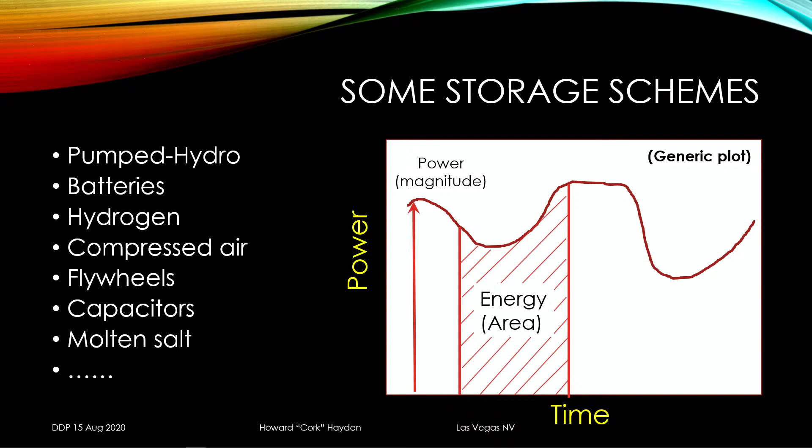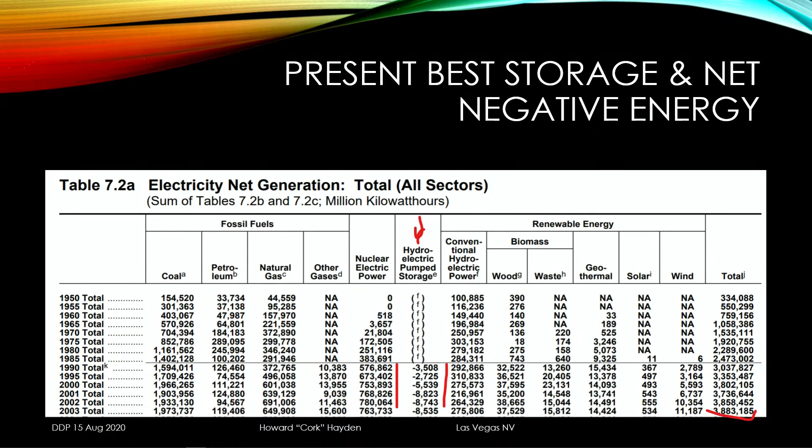Okay, now the first one we'll talk about here just very briefly is what's called pumped hydro, because that's the only candidate in town. There are no others. Pumped hydro. You'll notice I have a column there marked in red, and that's hydroelectric pumped storage, and you'll notice down there that the numbers are negative. All those storage systems are net losers, but sometimes you want a net loser simply because it makes other things work better, and that's good enough for the kind of people I run around with.

Now, down in Queensland, that's another place where the sun always shines. The university goes 100% solar energy. What do they mean by that? 100% of what? All electricity, all heat, all transportation, all the time? Or are they getting energy from elsewhere during the night and so forth?

Anyway, the knee-jerk answers to these questions are: you can store solar energy during the day, use it at night, so midnight solar energy is available, and it's cheap. And the wind is always blowing somewhere, and besides, there's storage. We will have some discussion about those matters.

But now we come to some things that kind of turn people's stomachs. It's called numbers. And we need to spend just a little bit of time with that. But the numbers for this purpose are not hard.

And by the way, I'm using the arithmetic system where 1 + 1 = 3 for very large values of 1. For example, 1.3 + 1.3 is 2.6, rounded up. It's 3, right? Very large values of 1.

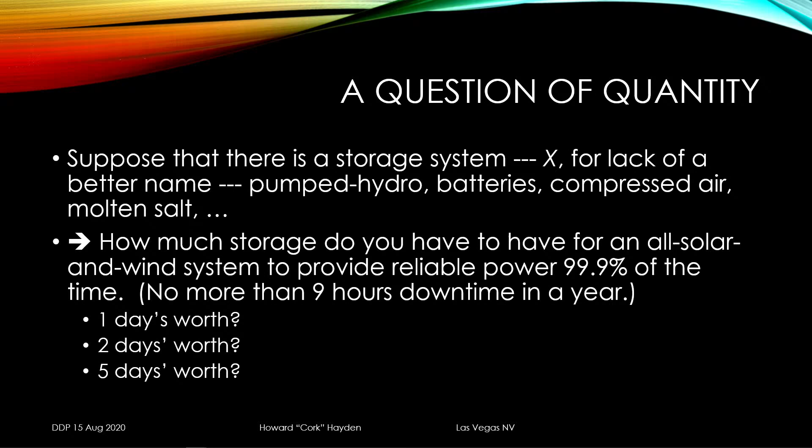Let me tell you about natural gas combined cycle, and you'll see why it's there. In an NGCC plant, the front end of the thing is a turbine engine, just like the one in the airplane that didn't fail, that brought you here, except that it doesn't have any thrust.

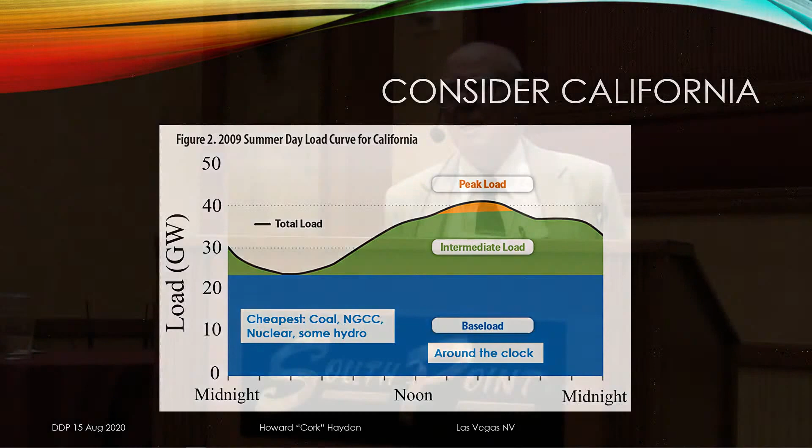By an invention that took place at Pratt & Whitney some years ago, they found a way to make single crystal, some kind of advanced metal alloy, that they use for the turbine blades, because most crystalline things are polycrystalline, and those grain boundaries are where things come apart. So they make things out of single crystal. So the upshot is that they can run those hummers at really high temperature, and you get really high efficiency. They run something like 45% efficient. But the exhaust comes out hotter than a $2 pistol.

So they run this exhaust through some big ducts, and a friend of mine has a factory in Pueblo where they make the ducting for it. And they send this hot exhaust over to a place where they now run a steam cycle. Well, the steam cycle isn't terribly hot steam, but it works. So they put the two together, and I think the highest efficiency so far is something like 62%.

They're really nice devices. Why not use them for the intermediate load? And the answer is, well, when you have a steam plant, you've got a big amount of thermal inertia to deal with, and you can't turn things on rapidly, and so forth. So the combined cycle units get used around the clock. For the intermediate load, typically people use natural gas and hydro.

If you look up the data on hydro power plants, you'll find out that they have an annual capacity factor of something like 30%. And the reason is that those plants come on, say in the afternoon when there's a big demand for power. They have lots and lots of separate generators. The water runs through all those generators, generates a lot of that power. The water level goes down. At night, they turn them off, the water level comes back up. So they're overpowered, and deliberately they're made for handling intermediate load.

Then there's the peak load, and you get out your billfold or your COVID-safe credit card.

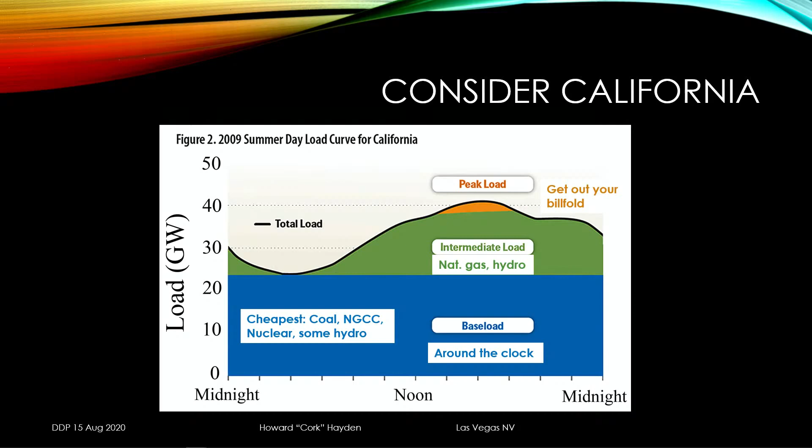Okay, so now the amount of energy we have to store. Now we're talking about generating energy for 1 day's storage. So we want to generate the area under that curve, under the black line there. That's how much energy we want to generate, but we have 4 hours to do it in. Therefore, we have to have about 6 times as much as the average power in order to charge the whole thing up in 4 hours. So we have kind of an odd thing here. We've got an average demand of about 35 megawatts. I'm sorry, this is 35 gigawatts, giga.

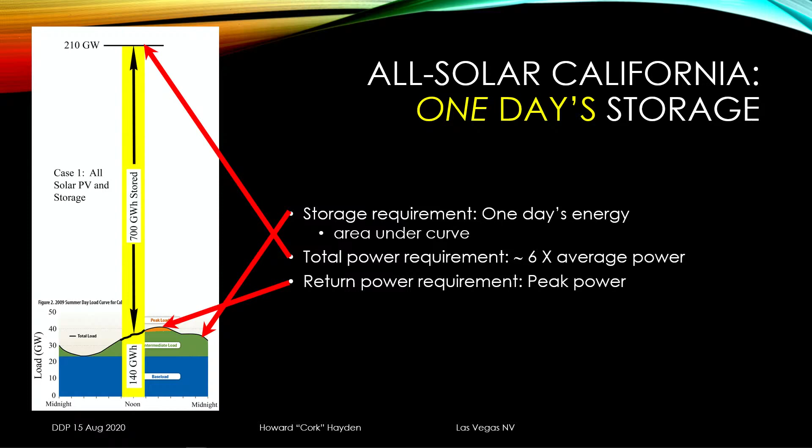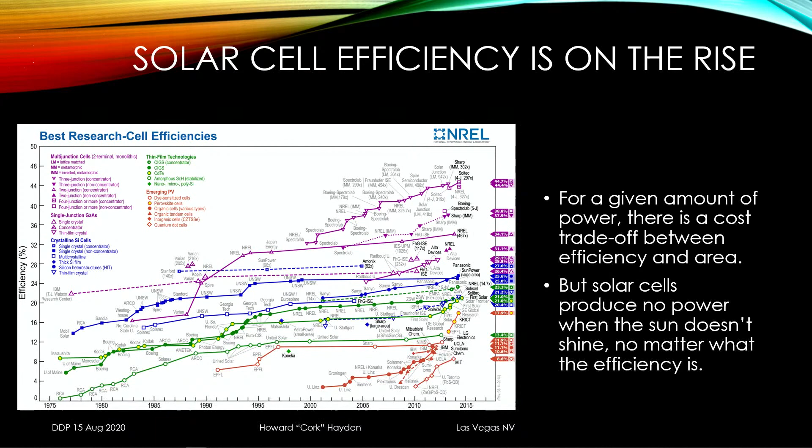But you see, the important thing here is that there is a trade-off. You want to generate a certain amount of power, you can use lots of cells at low efficiency or fewer cells at higher efficiency. So it really winds up being an economic, not a scientific discussion. Again, a reminder, solar cells produce no power when the sun doesn't shine, no matter what the efficiency is. All right?

Okay. Now we'll go to wind. Now, wind works a little bit better. The annual capacity factor for wind machines is about 35% by design. Now, let me explain that very briefly to you. Imagine that you had a pinwheel attached to a 1 megawatt generator.

What's the capacity factor going to be? 0. You're not going to generate any power with a windmill driving a 1 megawatt generator. So now we'll turn it around and say, suppose I have a 1 watt generator, sort of like the one on a bicycle for running a light, and I have a 200-foot diameter gadget spinning around. Well, I can always generate a watt, so I have 100% capacity factor. And both of them are absolutely worthless.

So the engineering compromise back in the 70s was to settle on an annual capacity factor of about 20%, and that way they got to brag about their big, at that day, 100 kilowatt or 200 kilowatt generators. Then they wised up and found out that's a big waste, putting that expensive generator on that little pinwheel sort of thing, and they settled on about a 35% annual capacity factor.

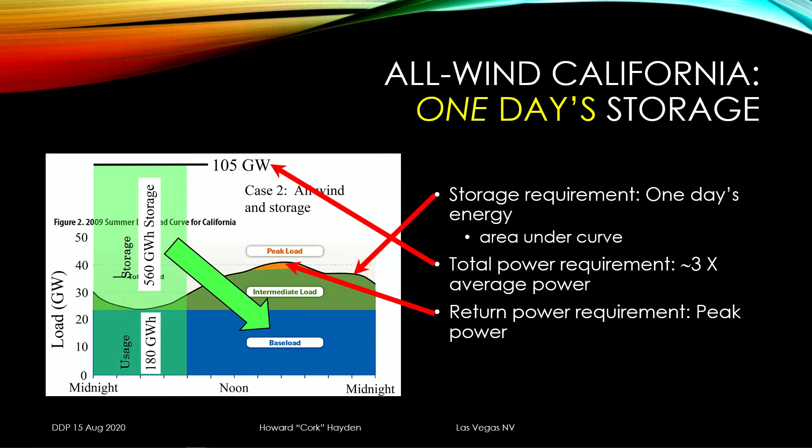Okay, now we come back to reality land, and the previous graphs I showed were for 1 day's storage. What if you're talking 2 days, 3 days, 4 days, 5 days? Okay? You've got to multiply those numbers by that. So in other words, you've got to have tremendous generating power, and you have to have tremendous storage.

Now I'm going to show you a rational alternative. Instead of having our baseload machines crank out just the baseload power and run all day long, instead increase that amount of power to equal the average. Now it's going to take something. You're going to have to increase it by like 30, 40%. So, okay, you do that. But during the night, you can store some energy, and during the afternoon, you can release that energy.

But the amount of energy that you have to store and the amount of energy you have to release is running something like 1/4 of one day's energy. So you're storing 25% of a day's energy instead of several days' energy or something like that. And the power you have to have is only roughly 30-40% more than you presently have, versus quite a bit more if you're dealing with solar and wind.

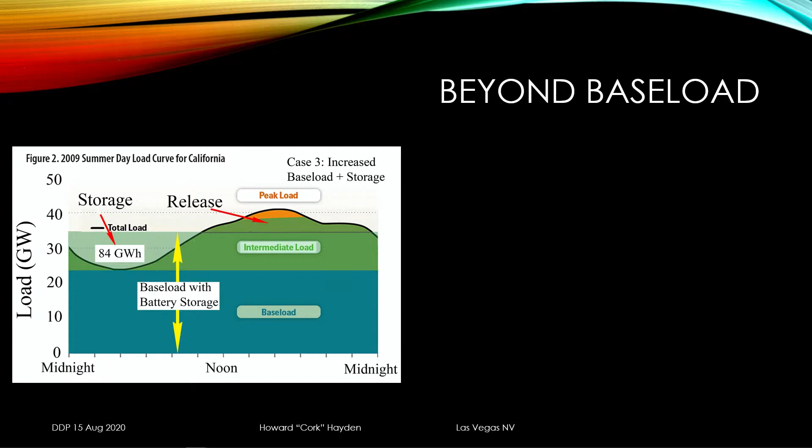So just increase the conventional power to equal the average power. Storage requirement is about 1/4 of a day's energy. Storage power requirement is 25% of the average power. No big deal. You can handle it.

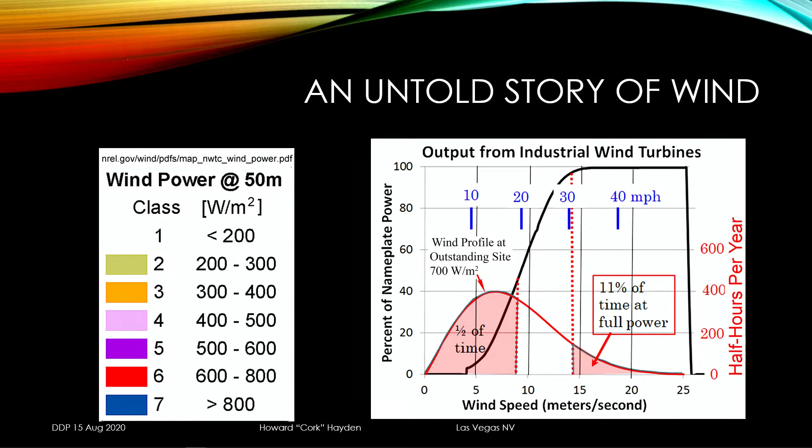Transmission is high voltage, like 100 kilovolts, 200 kilovolts, 750, a megavolt in some cases where they go to DC. The distribution is what they have going around your city, around your neighborhood. It's typically 40, 20 kilovolts, something like that, and then they bring it into your house at 110.

Okay, anyway, the T and D losses, which involve all the resistive losses in the wires, the radiative losses in the wires, the heat that's generated in the transformers and so forth, amount to about 6% of the power that's on the line. That gets some people's nose out of joint because, you find out, people make a mistake. They will talk about how inefficient the grid is.

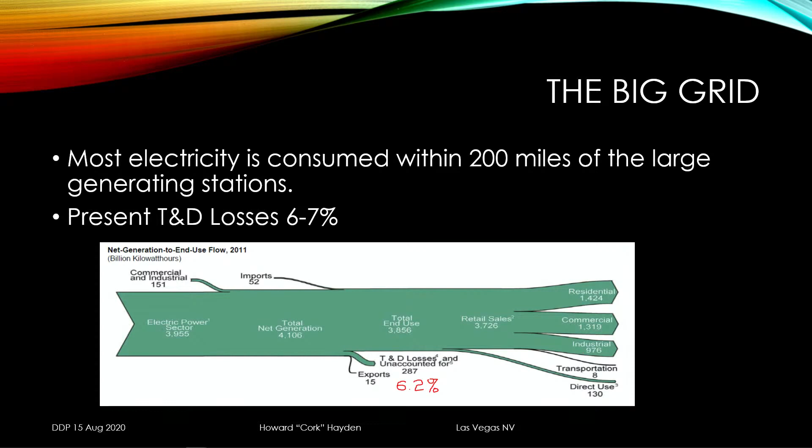And what they're doing is not talking about the grid, but about the way we generate electricity. If you use a system which converts heat into motion, that is governed by the second law of thermodynamics, and this is why, well, just the process of converting heat to work is notoriously inefficient, but we're doing pretty well when you get up to 62%. Okay, anyway, they talk about those losses converting heat to electricity as if they are part of the grid. That is not the case. The grid itself is responsible for only about 6% of the loss.

Okay, yeah, the sun is shining. It's always available somewhere. Sun is shining in Arizona, but Philadelphia needs power. The wind is blowing in North Dakota, but we have to ship it off to Los Angeles. High winds in Florida. Well, we got to be careful about that because when they get up to hurricane level, we have to shut them down. Power is needed in Chicago, etc. But the long and short of it is that in order to make this whole system work, you have to have pretty much every location capable of generating all the power you need. I'm exaggerating a little bit.

My mother told me 50 million times not to exaggerate.

Okay, so suppose we go to this much bigger grid that they call the macrogrid. What will be the T&D losses when Arizona provides New York with solar electricity? What will be the T&D losses when West Texas provides New York with wind-generated electricity? Do you agree it might be more than 6%? Yeah, we'll see. I don't know.

Now we're going to talk about energy loss in storage. You lose energy when you pump it into a storage system. And then you also lose energy that is stored by leakage, and how much depends on what kind of a system you have. For example, if you have a cavern with compressed air in it, maybe some air leaks out through the cracks in the rock, something like that. Take a brand new battery and just set it aside for a couple of years and see how much energy you have left. You've lost a certain amount, and so forth.

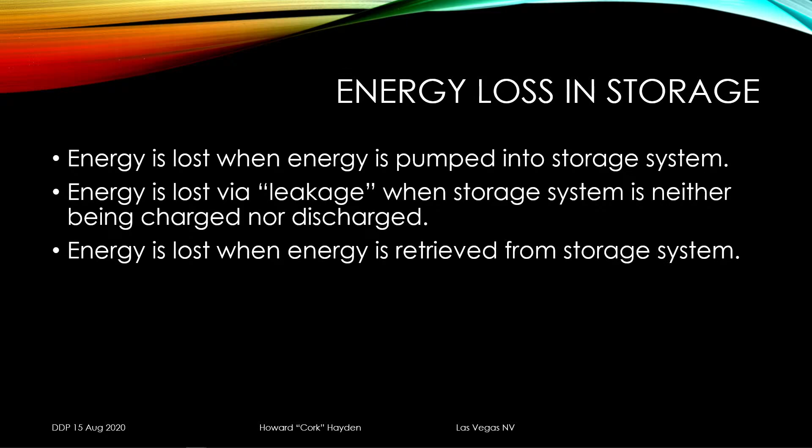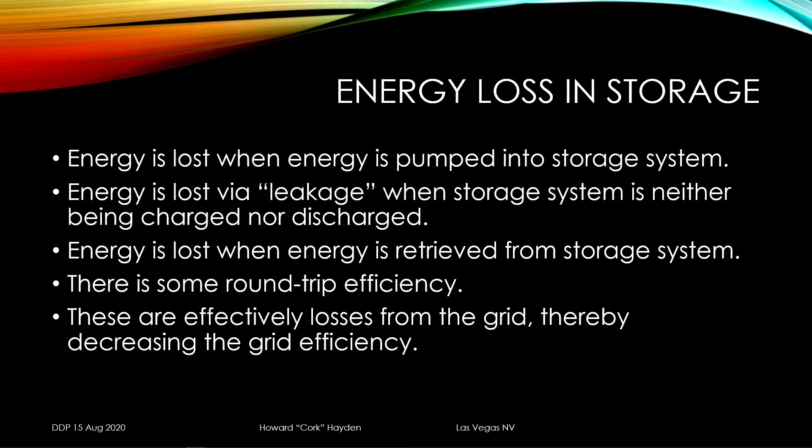And there's also the subsidy that solar and wind really can't run on their own. They have to have other power plants. Typically, let's say the wind is up a little bit and you got your turbines turning. You got to run your conventional power stations at roughly half power, because they have to be able to go down as well as up. In other words, a big gust of wind comes up and you generate a lot of power. You got to shed some power or produce less.

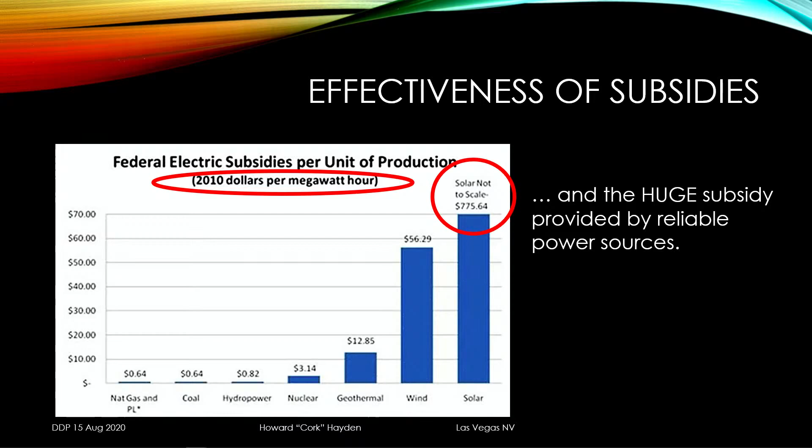In this regard, by the way, we have a power station in Pueblo that uses some General Electric, I can't remember what, some fancy name. But those are gas turbine units that can go from 0 to full power in 15 minutes, which is really very nice. Why'd they get them? Well, the same company has wind, and they have to be able to compensate for the wind. So without the backup, the solar and wind are basically worthless.

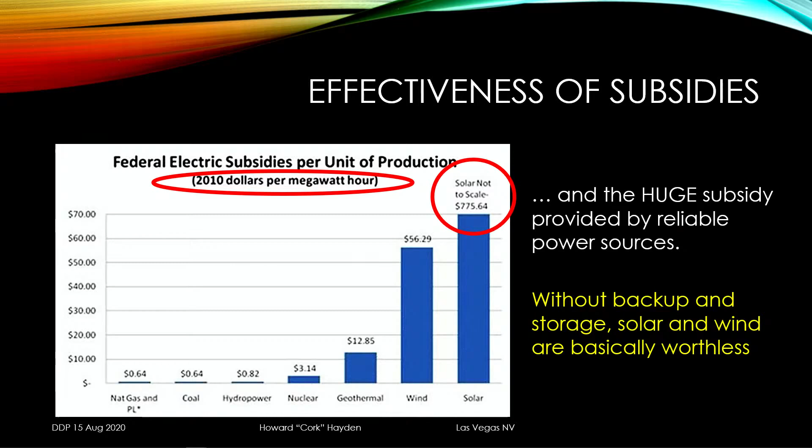And here is a graph that I came across sometime. Power blows past $9,000 cap in Texas as heat triggers emergency. But I just want you to look at that graph showing how much power is generated by the wind throughout one day.

You want 99.9% reliability. Would you agree with me that it's not particularly reliable? Okay, this is not the final slide, but it's a beauty.

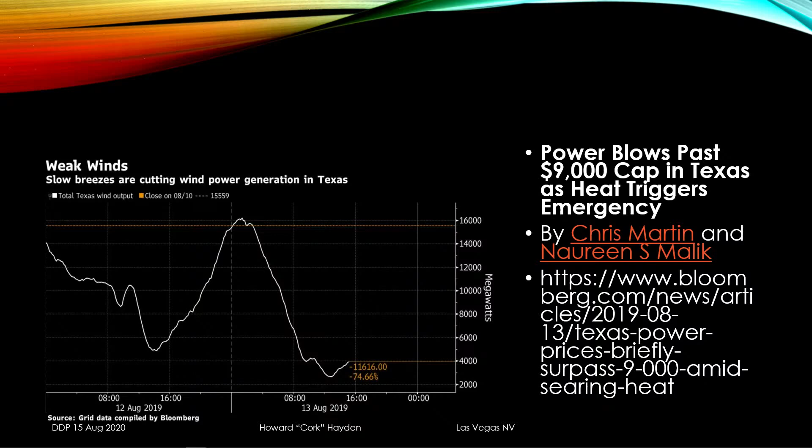Quote from Mark Jacobson and Mark Delucchi: "We estimate that around 3,800,000 5-megawatt wind turbines, around 49,000 300 megawatt concentrated solar plants, around 40,000 300 megawatt solar PV power plants, around 1.7 billion 3-kilowatt rooftop solar PV systems,

5,350 100 megawatt geothermal power plants, 270 new 1,300 megawatt hydroelectric power plants, 720,000 0.75 megawatt wave devices, and 490,000 1 megawatt tidal turbines can provide a 2030 WWS world that uses electricity and electrolytic hydrogen for all purposes." Remember, small is beautiful?

Okay. Now I'm going to talk about storage systems, if anybody's still awake. First, pumped hydro. What does pumped hydro look like? You have a low reservoir and you have a high reservoir and a pipe running between them. When you have excess power, you pump water from the lower reservoir up to the upper one. When you need some power, you let the water run down through the same pipe, and it turns a turbine, which turns a generator and generates electricity.

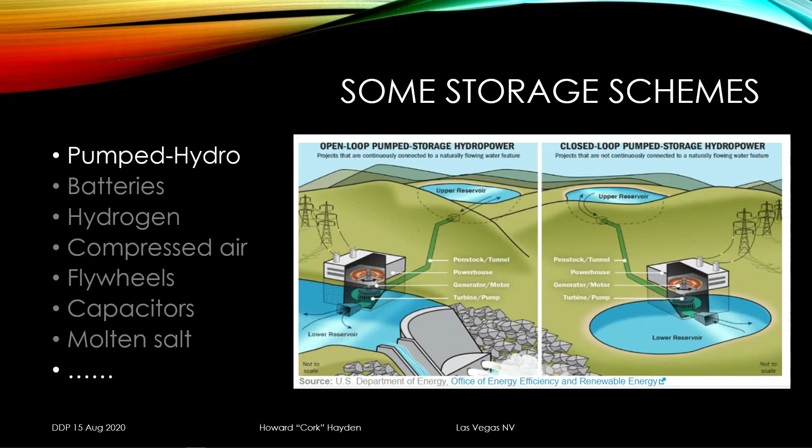We have one such system in Colorado called Twin Lakes, and I tried to get in there and find out some data once, but you know, I'm not one of the privileged people, and after 9/11, they don't let people do things like that. There's one in Massachusetts that uses the Connecticut River as the lower reservoir, and they have some lake in the mountains nearby. Well, I don't know how near it is, but it's many miles.

Okay, now most of the pumped hydro storage was built in the 1970s, and I've got this graph over here showing that it is net negative energy. But now I'm going to do some numbers here. It says they're typically losing around 5 terawatt hours in a year. And the average power in there is about 25 gigawatts, more or less. So the loss is about 2%, which isn't too darn bad as far as I can see.

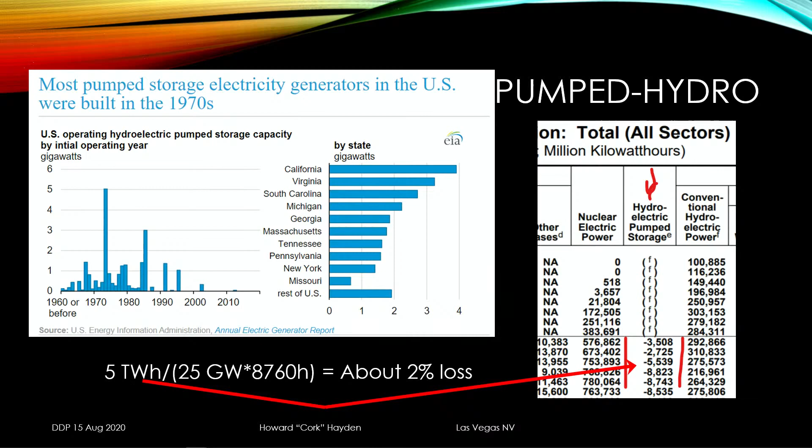Okay, now I'm going to talk about another storage scheme, which is called batteries. You look at this graph and you say, when did people install how much and what kind was it? And the long and short of it is that most of it was lithium batteries. There's a little bit of sodium battery in there, but this is an interesting topic we're going to have to say a little bit about, because the world doesn't have all that much lithium. But if you look at the numbers, it's Zippo. On a grid scale, it's zero, nothing.

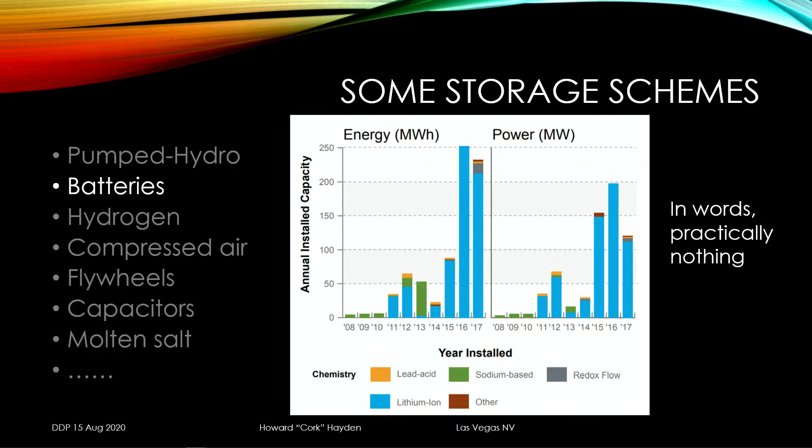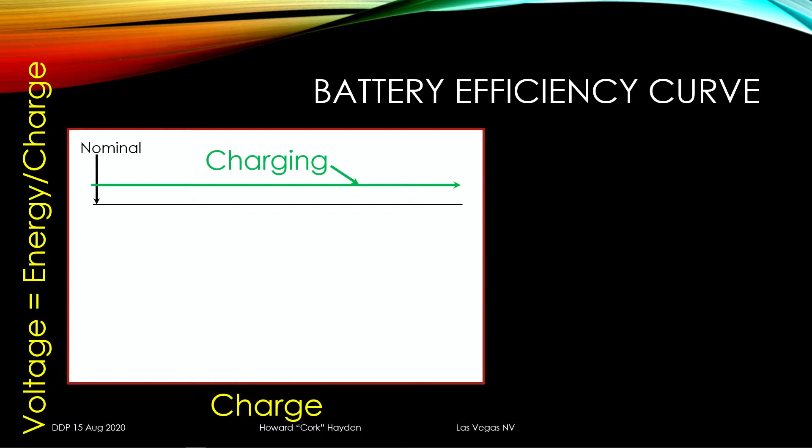Okay, so let me first talk about the battery in your car. The voltage runs around 12.6. That's a slightly temperature-dependent number, but we're going to call it 12.6. When you're charging your battery, the regulator on your alternator will run at something like 13.6, about a volt higher than the 12.6. And the faster you charge it, the higher the charging voltage.

When you discharge it, such as when you're starting your car, which is about the only time you'd run a discharge, the voltage might drop down to something like 12, 11.8, 11.5, depending on the condition of your battery and so forth. But the faster you consume it, the lower the discharge voltage. And the energy loss is what lies between, because voltage is energy per unit charge. That area in there represents lost energy, and you can see that it's running around 15%. It's a good enough number.

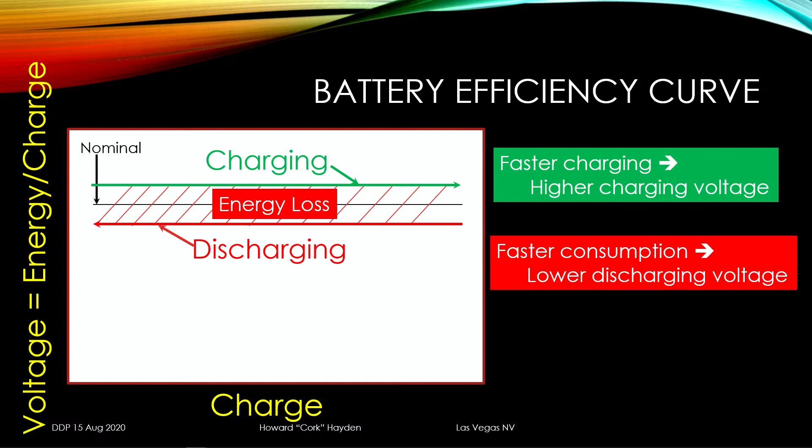Okay. Now there's a whole new issue of Chemical and Engineering News. They had a special report about batteries, and most of it is about various exotic ways of using lithium. Now, lithium has some advantages. It's the lightest metal. Well, technically hydrogen is a metal, but it isn't very hard.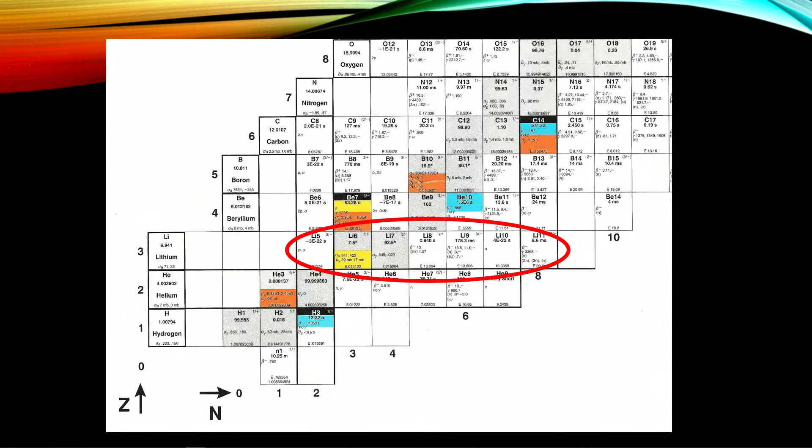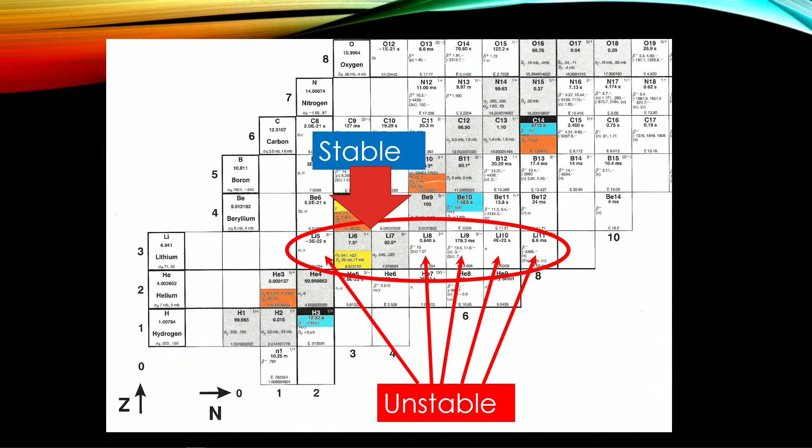Okay. Now, this is the part of that table showing lithium, and it has two stable isotopes and some unstable isotopes. Now we're going to do a little bit of exotic nuclear physics, all tied up in a graph. This graph shows what's called the binding energy per nucleon in MeV. And over at the left, you see lithium is circled.

We can gain energy in nuclear reactions by fusing things together, going to the right, or going to the left, starting at uranium over there, until we get to the nuclear graveyard, which is around iron-56. And the only reason we have all these exotic things is they were created in supernovae.

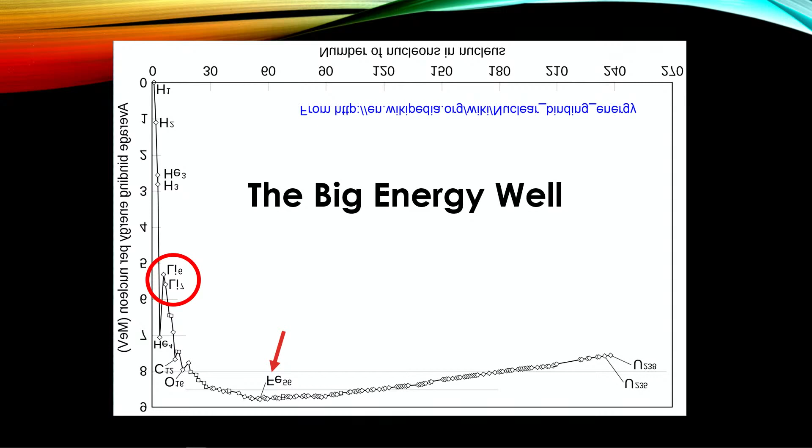But binding energy per nucleon may not stick well in your craw, so I'll turn it upside down and make it look like an energy well. Okay? The lowest energy is down at the bottom. That's the lowest energy state. I just flip the graph over. If you can't read it, stand on your head. But you can see that the two isotopes of lithium are kind of ready to come apart.

And here's an explanation why lithium is not very common. These are nuclear reactions that take place inside your local friendly supernova. Up at the upper left, we have some hydrogen atoms coming together, throwing off a positron to make a deuteron, gets hit by another proton, turns into a helium-3, then it hits with a helium atom. There's the helium-3, helium-4 collision, and it forms beryllium-7, which decays into lithium-7.

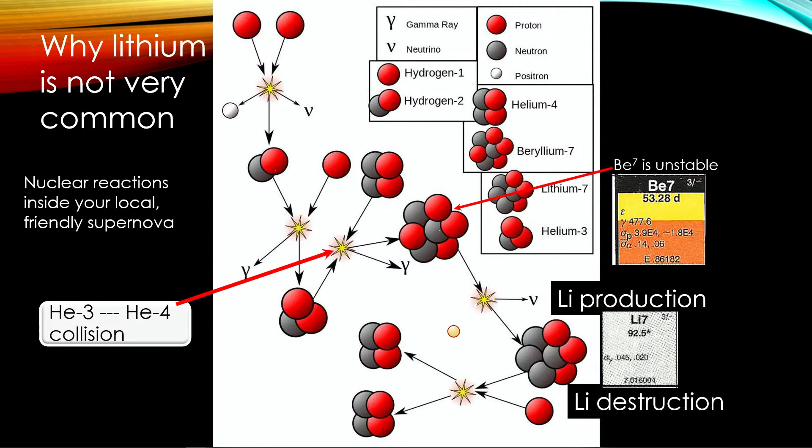Lithium-7 is sitting right down there. But lithium-7 gets hit by a proton and breaks apart into two helium nuclei. So there's a construction process and there's a destruction process going on. So we don't have a whole lot of lithium. So where are you going to find lithium? It has very largely the same chemistry as sodium. So where do you find sodium?

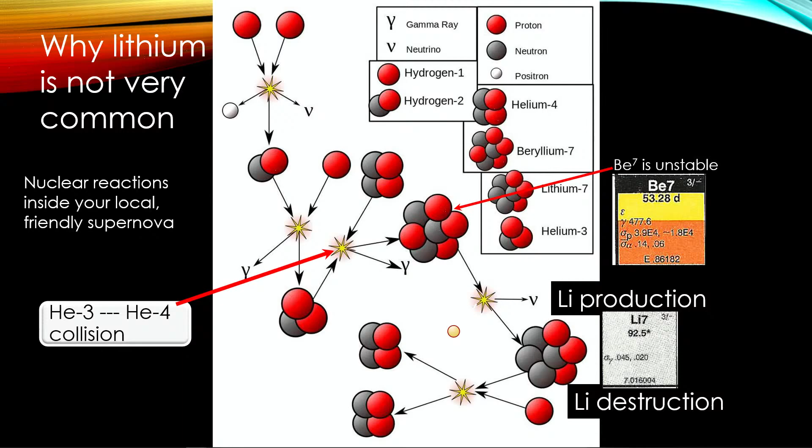Okay, now we're going to another kind of storage scheme called hydrogen. Everybody has done this way back in freshman chemistry. You can do some electrolysis and separate hydrogen from oxygen. And this particular graph shows that you could have liquid hydrogen and liquid oxygen in separate tanks. And instead of a generator there, you can use fuel cells, but your whole idea is to turn it into electricity. So anyway, you got a LOX tank and a liquid hydrogen tank, but no bagels.

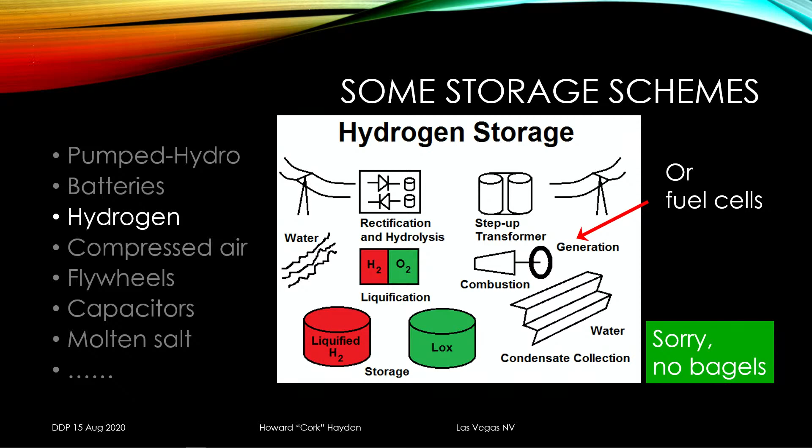Okay, so here's a hydrogen question. If you go to your local friendly compressed gas store and get a tank of hydrogen, where did that hydrogen come from? It did not come from electrolysis. It came from natural gas. It's just easier and cheaper to get hydrogen from natural gas than it is from water.

That's a reminder. Oh, and something else that's kind of interesting about hydrogen is that hydrogen just leaks into steel and causes hydrogen embrittlement. For those of you who are old enough to remember, there was a problem with Liberty ships going down in the Second World War. Remember that? You heard about it? Hydrogen embrittlement. The metallurgist named Carl Zapffe was the guy who figured it out, and the Navy set him up in his own lab to work on that problem.

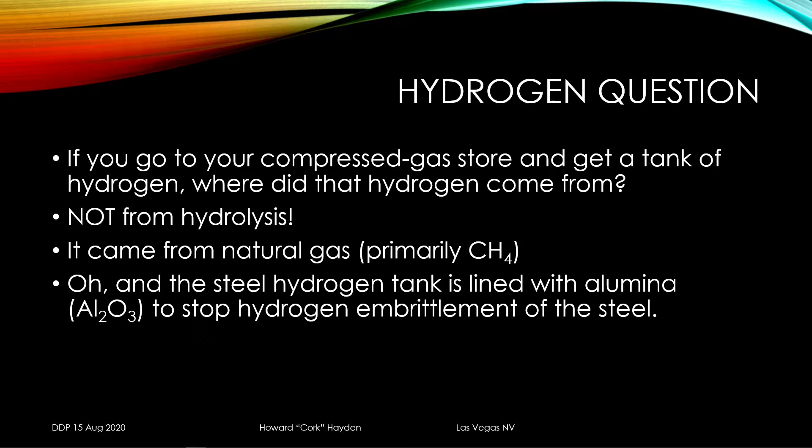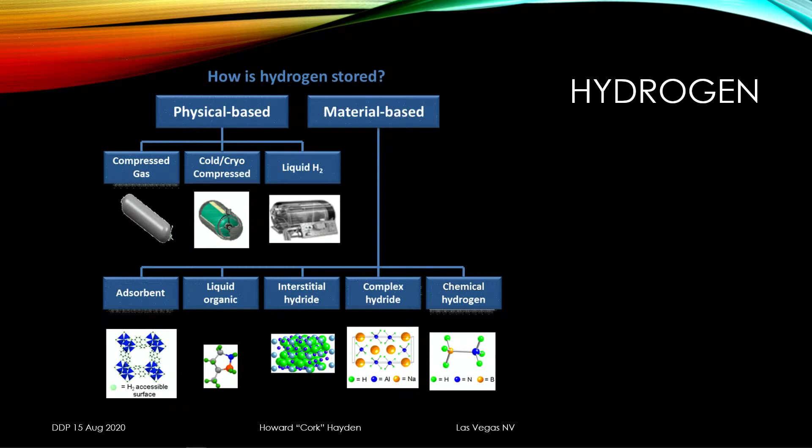Okay, but there are other ways to store hydrogen. You can compress gas, you can liquefy the hydrogen, and then you got various kinds of chemical matrices where you can store it and so forth. Whatever it is, they're all lossy. You lose energy going in, you lose energy coming out, you lose energy just during time.

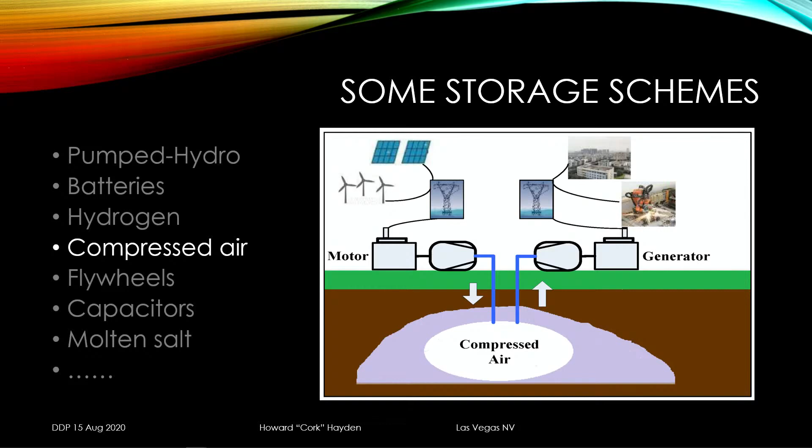Another storage scheme is compressed air, where you have a subterranean cavity with compressed air in there, and the overlay of the rock is high enough that the compressed air can't push rocks out of the way, though it could leak to some extent. You compress air in there, and then you can take it out and run it through some kind of a generator. And there is such a place where they're actually using it. It's called the Huntorf CAES, that's Compressed Air Energy Storage Plant.

Still in operation. It'll work, but there is a problem, and that is when you compress air, it heats up, and that heat is of no value to you. Okay, that's lost energy.

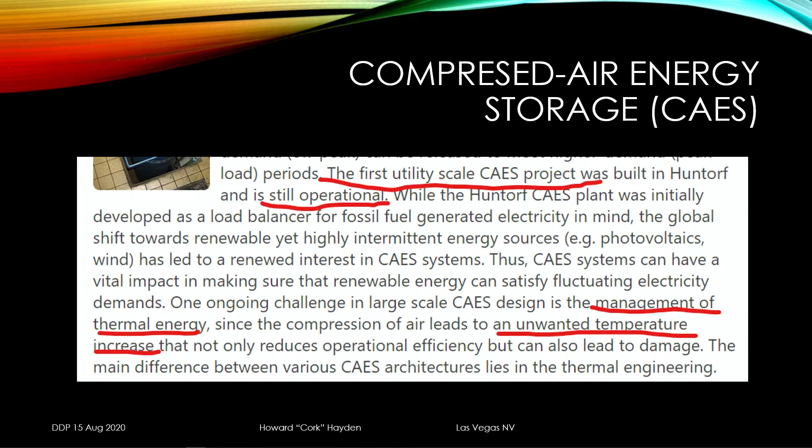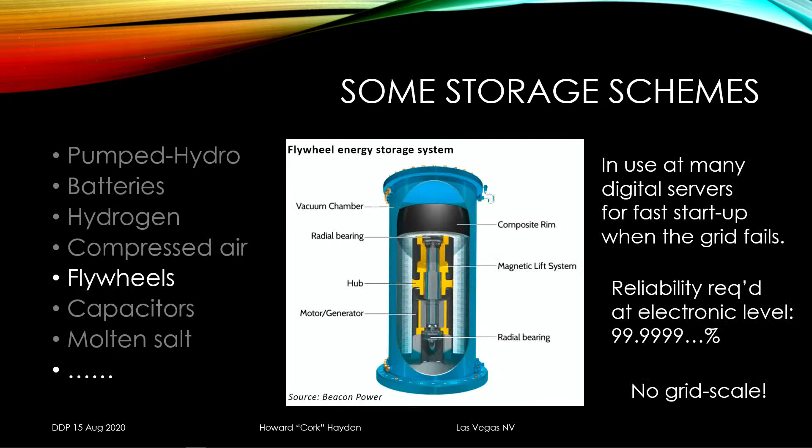They use these at big data centers where the power has just gone off, and you have to restore that power in a microsecond or something. That's where the switch kicks in. The flywheel keeps that thing running. It's slowing down, but during that time you start up your serious diesel-powered generation system. But this is small stuff. There is nothing that's grid scale.

Another one is to use capacitors. People think about that. But the voltage versus charge is not like it is with a battery. The voltage increases with the amount of charge. And on a grid scale, they're zip. They're nothing. But they are the first line of defense in an electronic circuit, because they can release energy on a nanosecond basis.

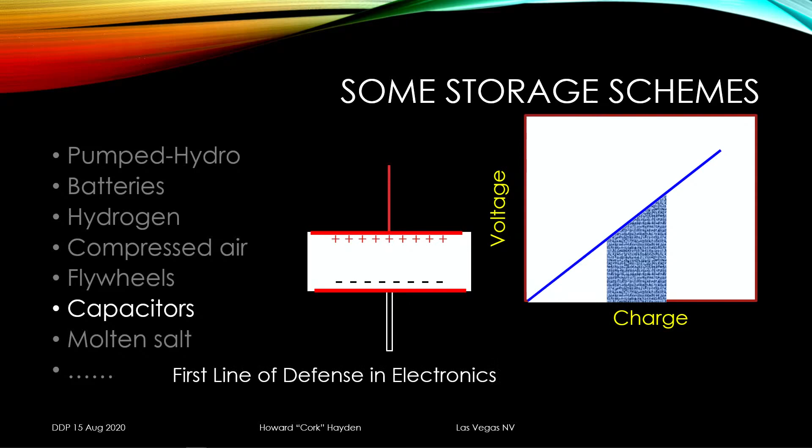Okay. The last one I'm going to talk about is molten salt. The whole idea here is this. Let's say you want to store energy in the form of hot water. We get water pretty hot. The hotter you get it, the more pressure it has, and the more corrosive it is. It's pretty awful, and it's a bit dangerous. But salt, like sodium, can be stored at high temperature but at low pressure. It isn't going to blow apart on you.

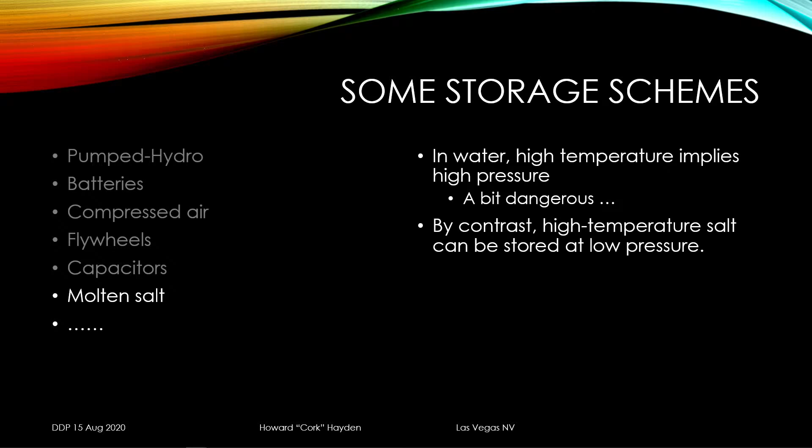So the whole idea is to have a storage system where you just store heat. You take heat, say from sunlight, store it as heat in this molten salt, and then you can release the heat to run your generators and stuff. Molten salt storage is 33 times cheaper than lithium ion, it says here.

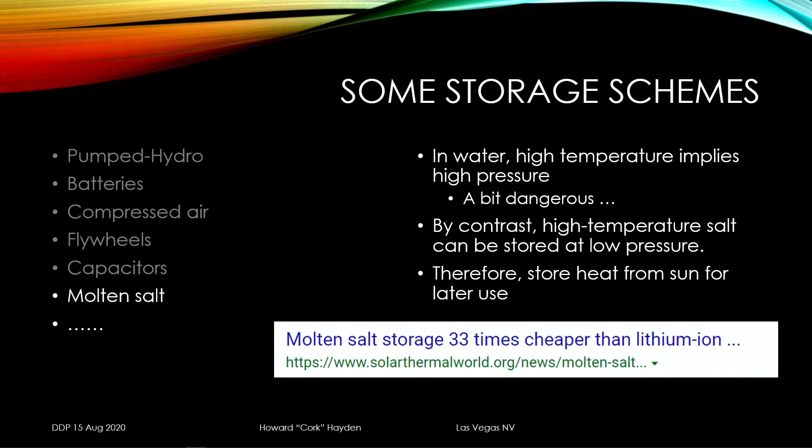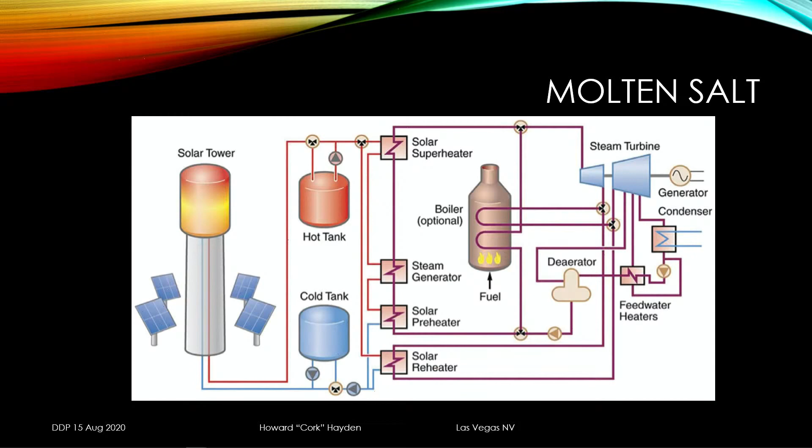Here is a scheme where you have a solar power tower, a high temperature sodium source and a low temperature sodium source, and you transfer one to the other. You pump the sodium through a heat exchanger, which heats up water, which turns to steam, which runs your steam generator, blah, blah, blah. And it's absolutely wonderful.

When I was a kid, I had a Boy Scout signaling mirror about this size. It had a nice shiny mirror on the front, a circular mirror on the back and a transparent plus sign in the middle. Say the sun is up there, you hold this thing up like this, and you can see in the reflection the sunlight that comes through the cross on your cheek. Then you align that with the cross you see here, with your target. You line up the three, a purely analog process, and you can get the sunlight where you want it. I was pretty good at it, but I was only 10.

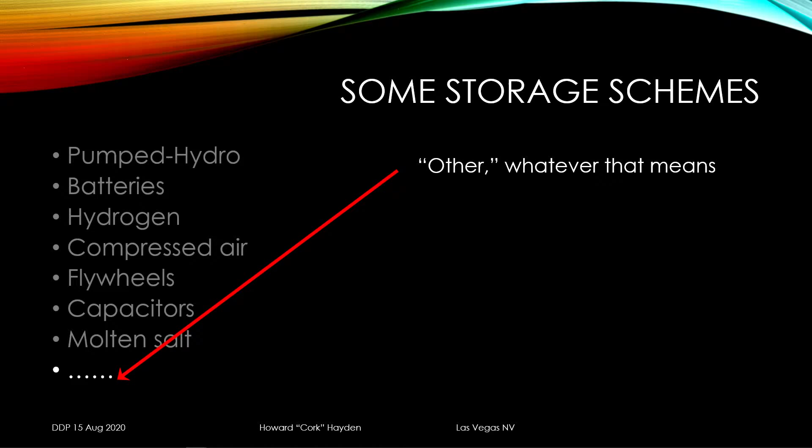Okay, you take their claims with a bucket of salt, something like that. And then we come to this thing called other. They always talk about wind and solar and other. And they'll talk about storage schemes, this, that, and everything, and other. And exactly what does that mean?